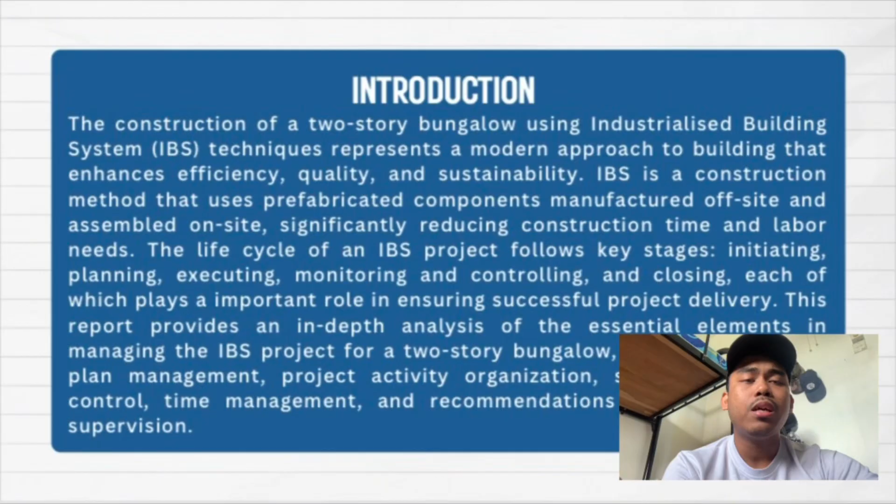This report provides an in-depth analysis of essential elements in managing the IBS project for a two-story bungalow, including life cycle plan management, project activity, organization, supervision, quality control, time management, and recommendations for enhanced site supervision. There are 5 suitable life cycle plan management stages.

Number 1 is initiating. Determine design and layout of the two-story bungalow, including specific details like the number of rooms, style, and structural specification for the bungalow. Confirm client requirements, necessary permits, and budget.

Number 2 is planning. For this two-story house, detailed planning is essential. Determine the floor plan and structure, selecting specific IBS components, e.g. wall panels, floor slabs, that meet load bearing requirements for two stories. Decide on transportation logistics for larger components, as a two-story bungalow requires careful handling for height and weight.

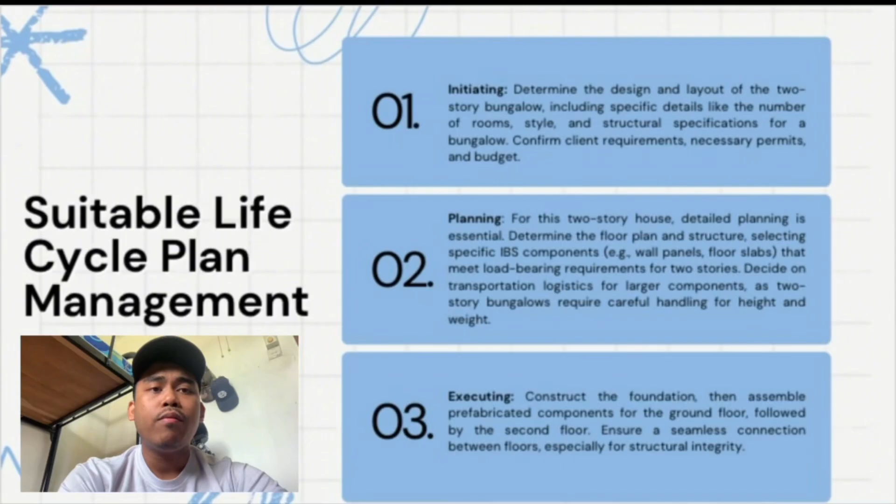Number 3 is executing. Construct the foundation, then assemble prefabricated components for the ground floor, followed by the second floor. Ensure a seamless connection between floors, especially for structural integrity.

Number 4 is monitoring and controlling. Monitor for quality issues such as alignment between floors, structural stability, and load distribution. Track the schedule to avoid delay between ground floor completion and upper floor assembly.

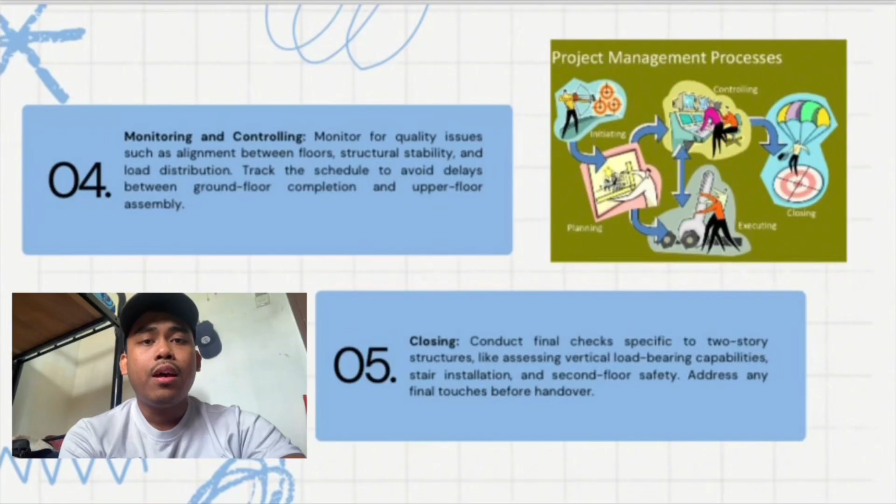And the last one is closing. Conduct final checks specific to two-story structures, like assessing vertical load-bearing capabilities, stair installation, and second floor safety. Address any final touches before handover.

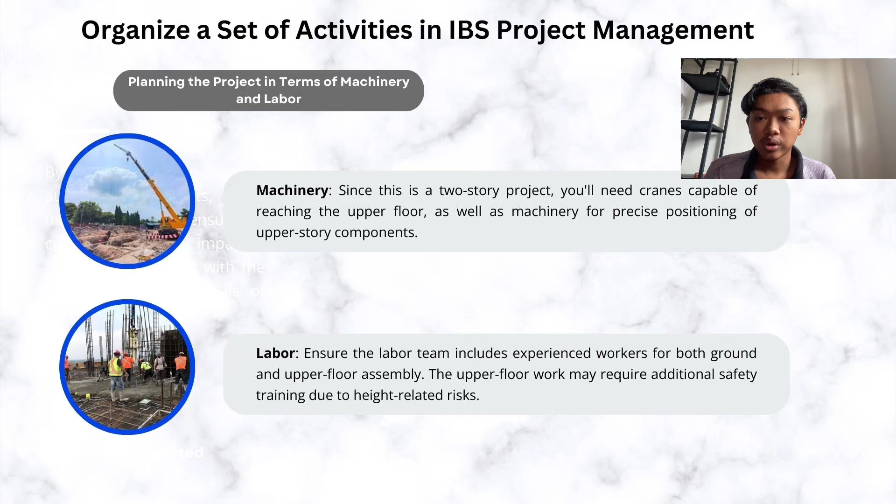Number 1 is planning the project in terms of machinery and labor. First is machinery. Since this is a two-story project, you will need cranes capable of reaching the upper floor, as well as machinery for precise positioning of upper story components. Next is labor. Ensure the labor team includes experienced workers for both ground and upper floor assembly. The upper floor work may require additional safety training due to height related risks.

Number 2 is the work schedule for the IBS project Gantt chart. First is ground floor assembly. Start with foundation work, followed by installing ground floor walls, floors, and structural components. Schedule a specific time frame to allow the ground structure to settle if required.

Next is upper floor assembly. Once the ground floor is stable, begin assembly for the second floor. This may include lifting heavier components and requires careful scheduling to avoid overloading the ground floor prematurely.

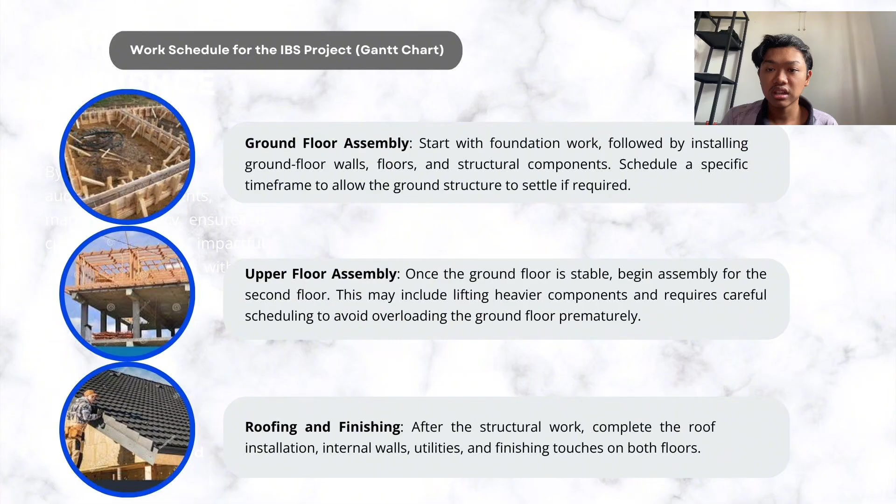Lastly is roofing and finishing. After the structural work, complete the roof installation, internal walls, utilities, and finishing touches on both floors.

Number 3 is cost of the IBS project. First, we have material. Account for additional materials like structural supports or beams that are necessary for the second floor. Second floor walls may require reinforced material.

Next is labor. Allocate a higher labor cost due to the extra complexity involved in two-story construction, including the need for specialized skills for upper floor assembly. And lastly is machinery. Factor in additional cost for equipment capable of lifting material to the second floor and handling larger components.

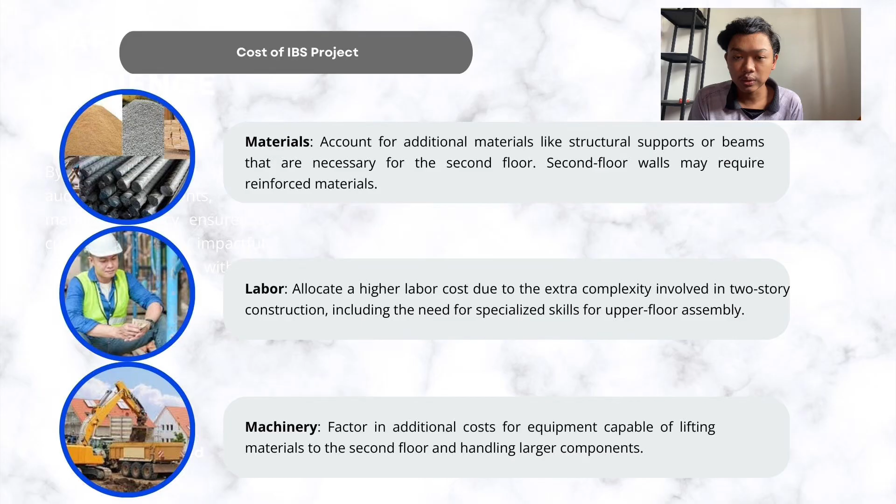Ground floor supervision: ensure that all initial groundwork, including the foundation and ground floor assembly, meets quality standards since they are critical for supporting the second floor.

The second one is upper floor supervision. Pay close attention to alignment and structural stability when assembling the second floor. Supervision should confirm that all connections between floors are secure and meet load bearing standards.

And the last one is quality check at each level. Inspect the quality of prefabricated components, focusing on load bearing parts, and conduct thorough inspection after each floor's completion to identify issues before moving to the next stage.

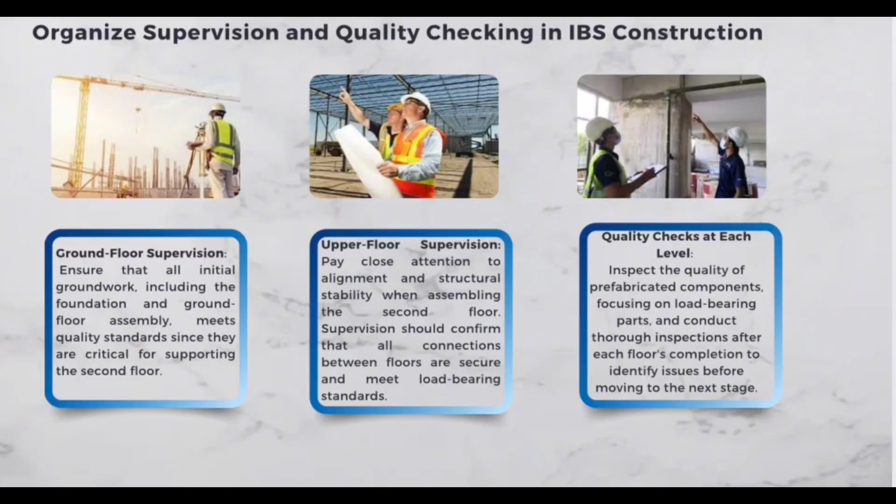Next is efficient management of time and resources during supervision and quality checking. Efficient scheduling for multi-level work: ensure the project schedule allows enough time for the ground floor to stabilize before starting the second floor, as rushing this could compromise structural integrity.

Resource allocation for two-story needs: schedule machinery and skilled labor specifically for the second floor to avoid delays. For instance, allocate cranes for upper level work at appropriate times to avoid competition for equipment.

And the last one is prevent rework by ensuring floor level quality. Address any quality issues on the ground floor before starting the second floor to ensure quality, and reduce the risk of having to dismantle or reassemble upper floor components.

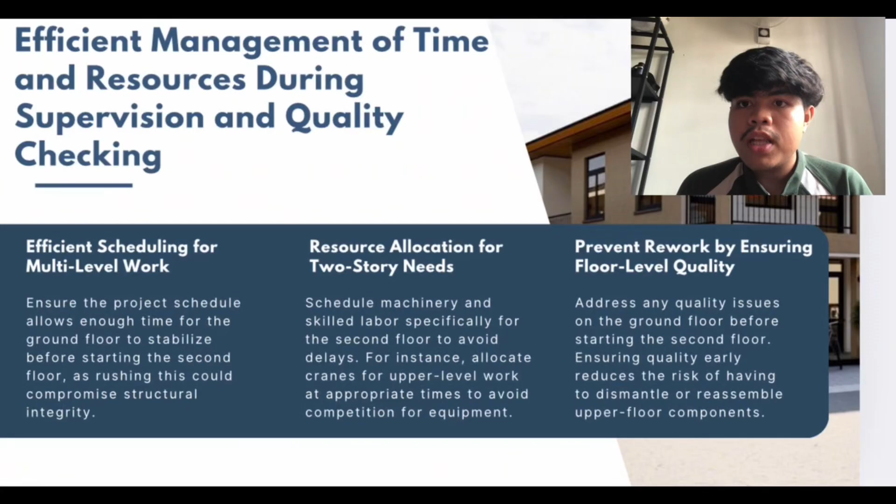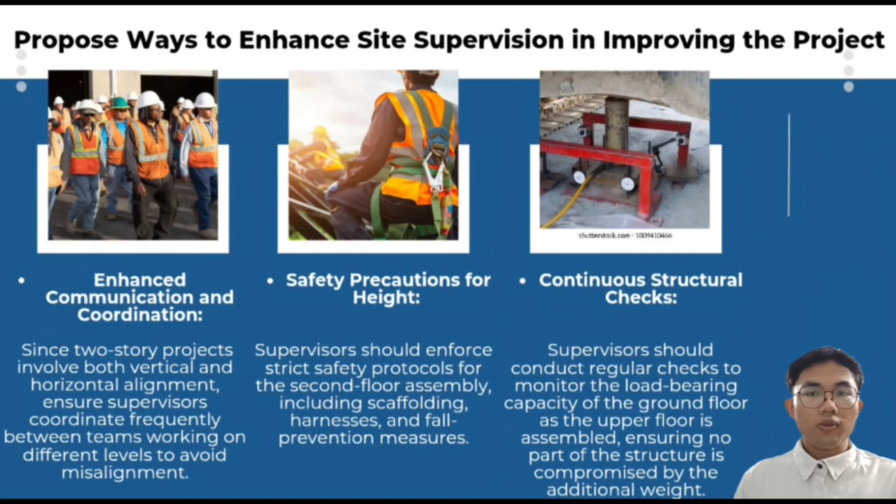Supervisors should conduct regular checks to monitor the load-bearing capacity of the ground floor as the upper floor is assembled, ensuring no part of the structure is compromised by additional weight.

In conclusion, the application of IBS in constructing a two-story bungalow has proven to be an efficient and effective solution for meeting modern construction demands. By following a structured project life cycle and implementing rigorous planning, supervision, and quality control measures, this method ensures a high-quality build within a shorter time frame.

Proper time and resource management alongside continuous monitoring are crucial for maintaining project momentum and preventing delays. The recommendations provided for enhanced site supervision will further improve the project's outcome, ensuring a safe, efficient, and high-quality construction process. Through effective management and the use of advanced IBS techniques, the project successfully demonstrates the benefits and potential of industrialized construction systems in residential housing.